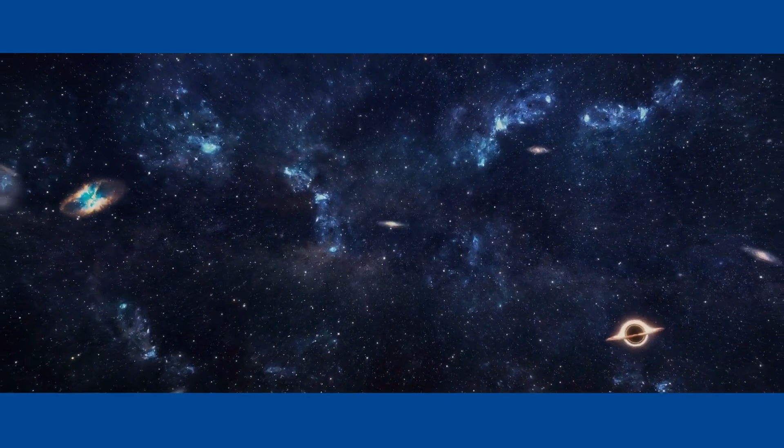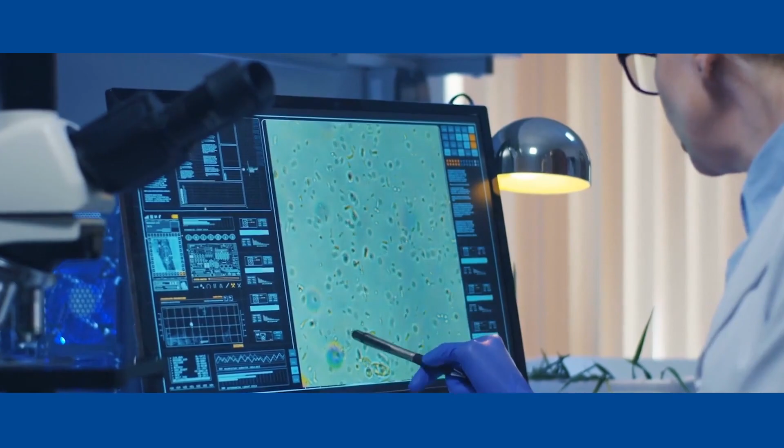In our universe, all things are driven by energy. Energy powers our sun, our environment, our society, even our bodies. Energy is life. New and profound advances in science and engineering are allowing us to harness this energy abundance in marvelous new ways.

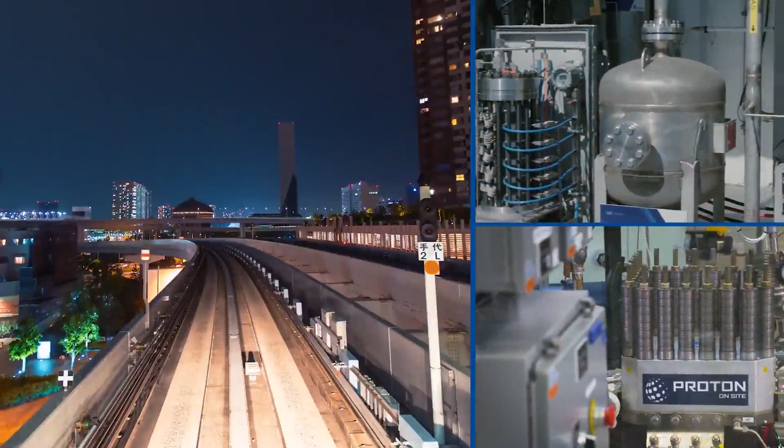To create clean, affordable, and reliable energy for all Californians, the SoCalGas Research Development and Demonstration Program has enlisted an incredible team of experts in science, engineering, industrial technology, and environmental policy to identify, build, and implement these transformational technologies throughout society.

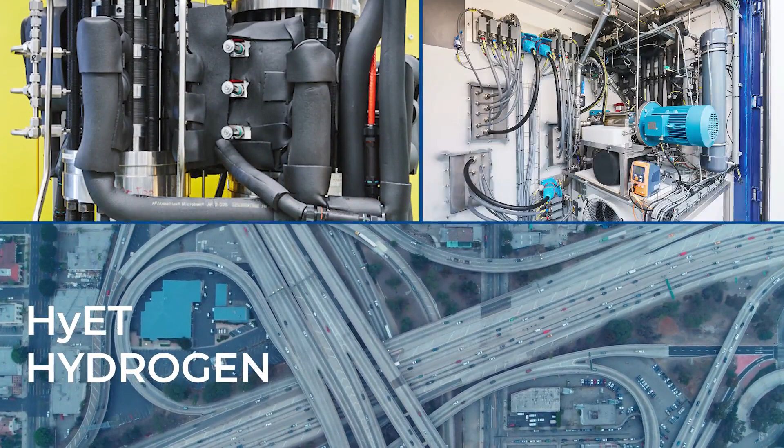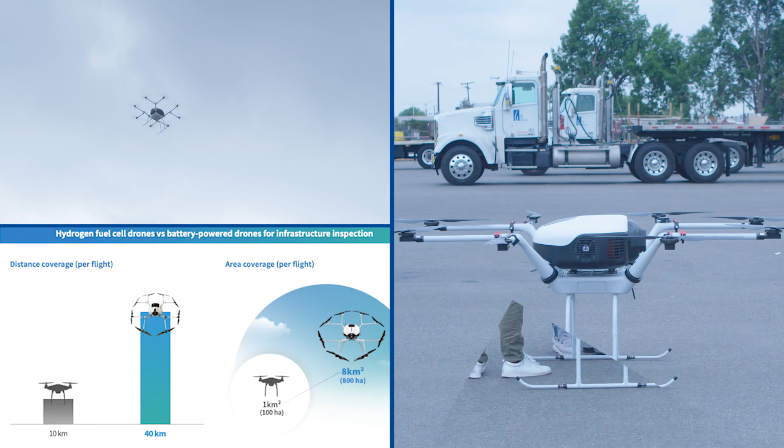Collaborating with the world's top institutions, we have deployed over $73 million on hundreds of groundbreaking projects over the past 5 years. HyET Hydrogen, which could enable transporting hydrogen through existing infrastructure to power fuel cell vehicles and facilities. Doosan Mobility Innovations hydrogen drones that have 4 times the flight capacity of lithium-ion powered alternatives. And hydrogen-powered yard trucks that can move massive shipping loads for 20 hours per day with 0 emissions.

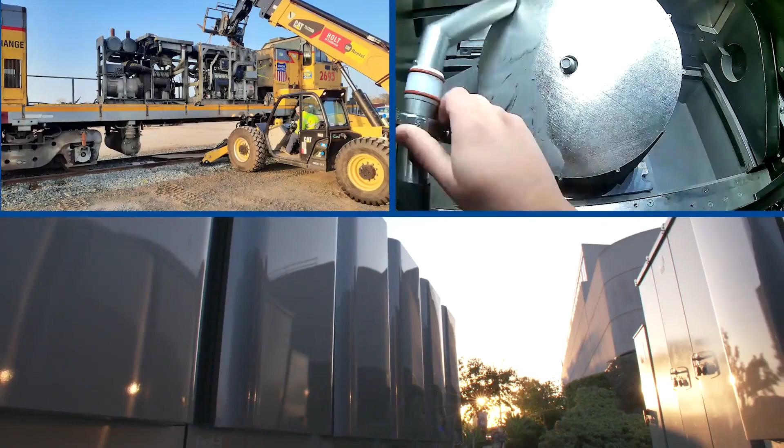These revolutionary projects are saving energy, reducing emissions, and improving air quality, as well as increasing energy safety, reliability, and affordability for all.

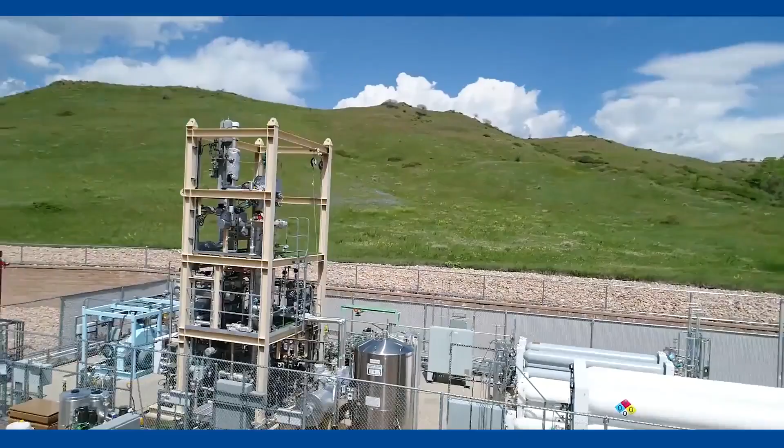At SoCalGas RD&D, we believe in clean energy abundance. So we are sharing this pivotal research in order to deploy these innovative technologies across the world. Because energy is life. And we believe a clean energy future will bring a better future to everyone.

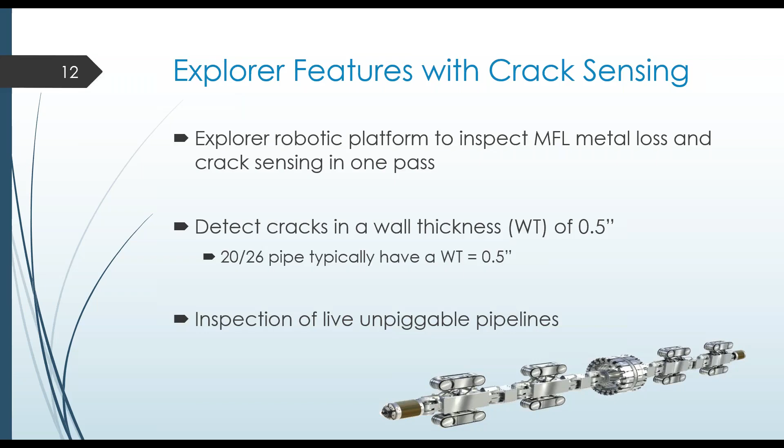There's been a lot of work and technology development to get where we are today detecting cracks in the pipeline. Some of the early crack sensing designs were detecting cracks on the full circumference of the pipe. One product used transverse magnetic flux leakage, TMFL, and electromagnetic acoustic transducer technology, EMAT. The second design is a full circumference anisotropic magnetoresistance, AMR, eddy current sensor, which we'll get into later. I just wanted to give an overview of some of the early designs we looked into.

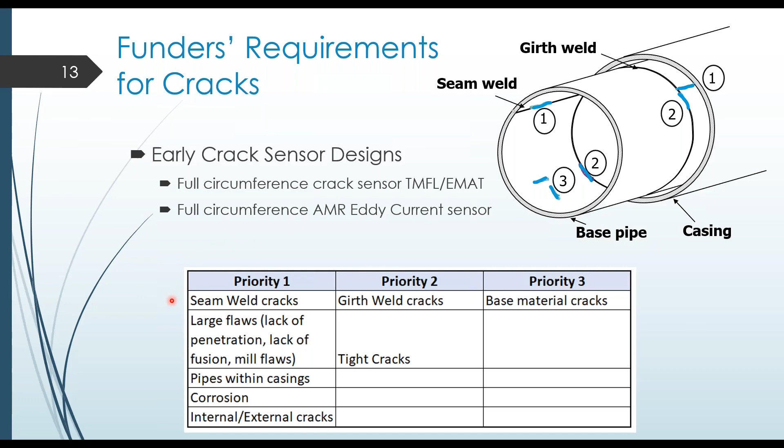NYSEARCH's journey into crack sensing began in 2011. We started with the full circumference TMFL and EMAT sensor. Although very successful, there were some challenges with that design, so we continued investigating technologies to optimize it. In 2013, we moved to the AMR eddy current design, which also had some challenges, but I'll get into these designs and challenges in this presentation.

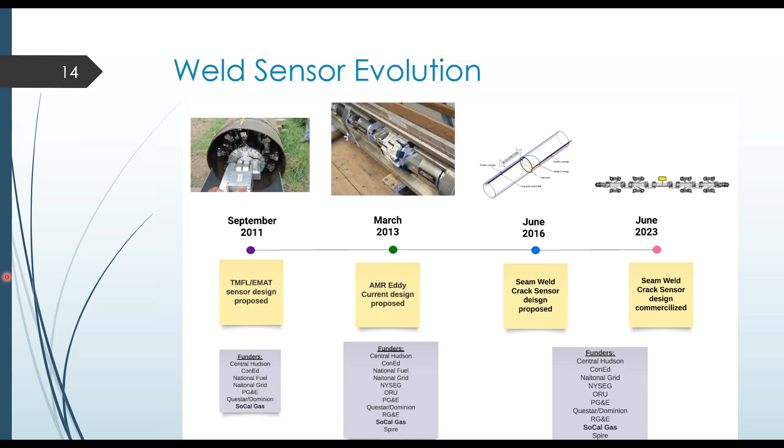The first technology I'll talk about today is the TMFL EMAT sensor. Current technology on the Explorer robot can determine metal loss on the pipe due to corrosion using the magnetic flux leakage, MFL, sensor. These sensors magnetize the pipe wall in the axial direction, providing great capability for corrosion defect detection. But when we rotate 90 degrees, magnetization detection of axially aligned cracks can be achieved. This is known as transverse magnetic flux leakage, TMFL. The other part of this sensor technology is the EMAT.

This brings ultrasonic methods to applications where we don't need gel or water to bring out the acoustics. The EMAT sensor system requires a magnetic field in the base material along with a pulse coil that causes an acoustic pulse to travel through the material. These two technologies, working together on the robot, were successful in finding cracks on that full crack sensor pipe.

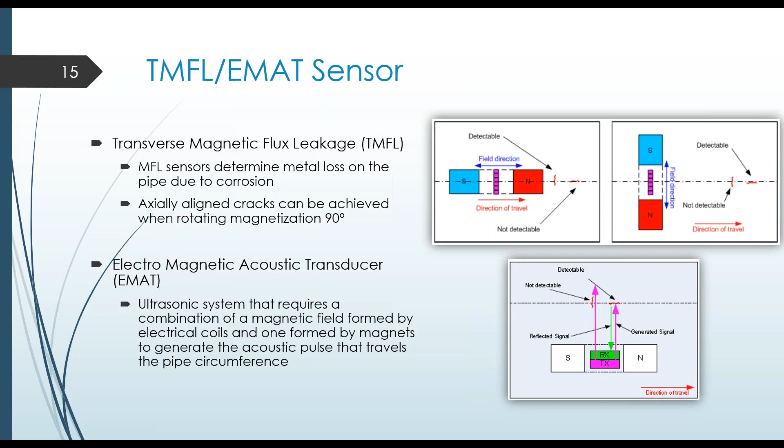So this technology was successful. It was able to detect cracks at depths greater than 25% of the wall's thickness. Since it was a full circumference crack sensor, it could detect cracks along the full surface of the pipe in one single pass. But it was separate from the MFL mechanical damage sensor, so two passes would be required: one for standard MFL mechanical damage and another for this crack inspection.

However, the commercializer believed it was too heavy and difficult for the Explorer robot to maneuver, and it was sensitive to debris and girth welds. So we ended up looking at other technology, as I said.

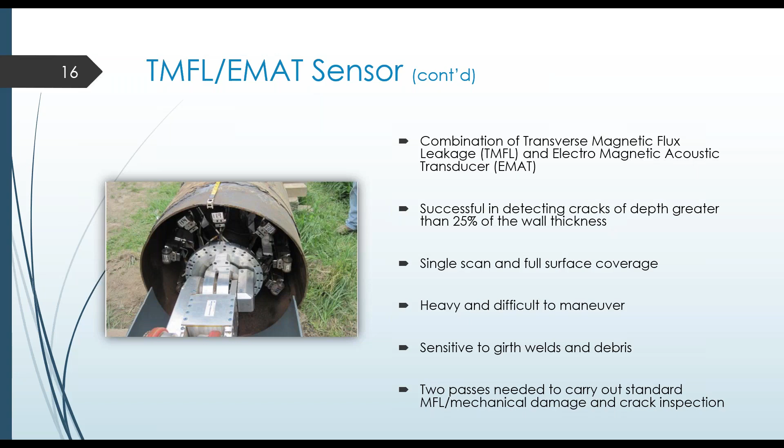The second technology we want to talk about today is the anisotropic magnetic resistive, AMR, eddy current design. Eddy currents have a fundamental depth limit defined and measured by the skin depth - the depth at which electromagnetic currents penetrate into the surface of the material, depending on the material's conductivity and permeability. Some flaws were estimated to be deep enough that only a tiny fraction of the eddy currents would reach them, making it unlikely they could be seen with this eddy current sensor.

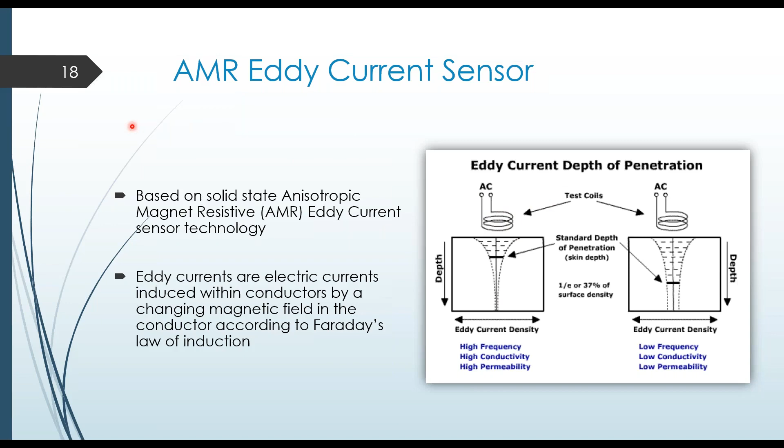This was also a great design. It was lightweight and easy to maneuver. It was a full circumference crack detection design, so it could detect cracks on the base material and on the seam welds. However, it was sensitive to debris, and it wasn't great for larger pipes due to their thicker walls. The downside of that eddy current is the depth of penetration through those pipe walls, so this technology was really only good for pipes about 14 inches or smaller in diameter, since they have smaller wall thickness.

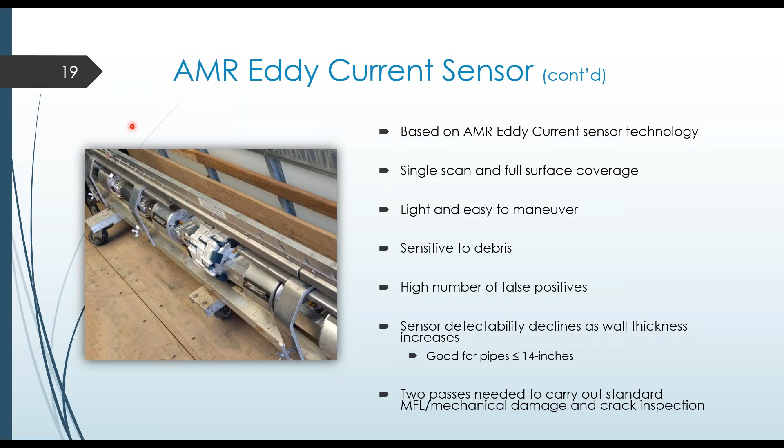Additionally, because the eddy current was a full circumference crack sensor, this needed two passes - one for the standard MFL for mechanical damage, and this technology for crack inspection. So this technology satisfied most of all our R&D priorities, but this sensor was sensitive to debris, though it did work well for pipes 14 inches or less in diameter.

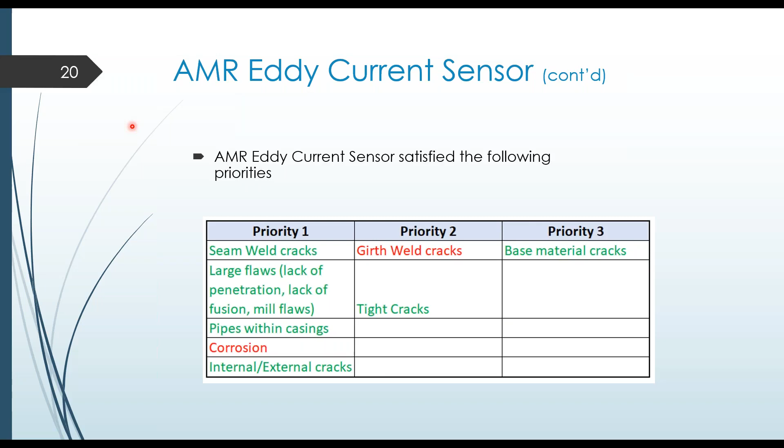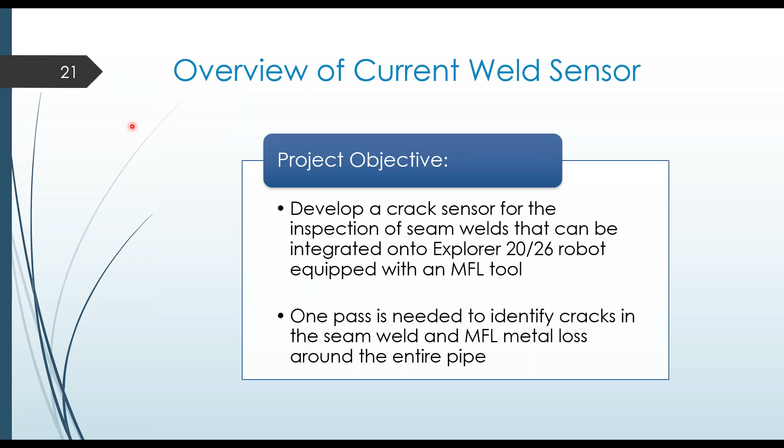Getting into our current design for our Seam Weld sensor - in 2016, when we looked at the R&D priority list again, we decided to target the seam welds and develop a Seam Weld Crack Sensor. In making that decision, we decided it would be great if we could do one pass, if we could build a robot with the MFL tool for mechanical damage and the Seam Weld Crack Sensor, so we would only have to do one pass instead of two like our previous two designs.

To satisfy those requirements, we designed a crack sensor module that would have two sensor modules, one in front of the MFL tool and one behind it. This design would have full coverage of the seam weld and have the MFL metal loss module as well in the center. The way this design works is the two modules work in concert.

The front would act as the leader and the second would act as a follower. The first one would find the girth weld and then look for the seam weld. Because it does miss the beginning of the seam weld, once the leader locates the seam weld, the second one would move to the seam weld before it reaches the girth weld.

I have a video - this is detecting the leader, and this is the follower, same here. This diagram shows it, but I do have a video if I can pull it up.

I don't know how to... I think I might have to get out of this - oh, here we go.

So the video shows the leader. It finds the girth weld and it's now looking for the seam weld to move into position. It now communicates to the follower where the seam weld is so it can transition before it gets to the girth weld. With both of these working in concert, you can get full 100% coverage of the seam weld. I'll play it one more time just to get a feel for what the two working together looks like.

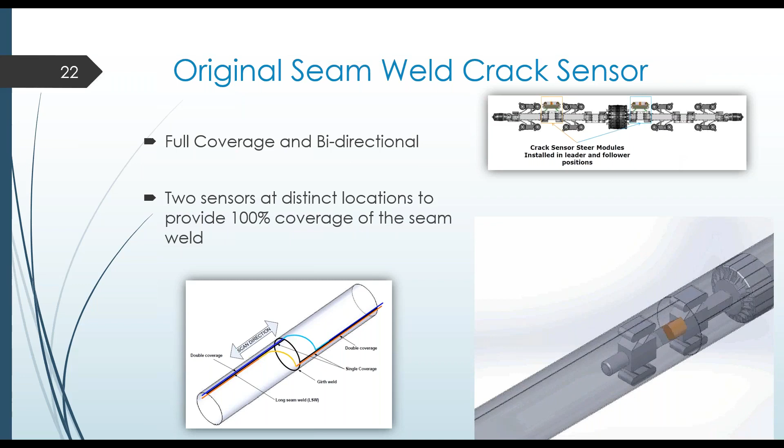Things that are going on in this robot: we're looking for the girth weld to signal the seam weld location change, and we're looking to read the welds on the cracks.

In the early phases of this project, we struggled with finding the low signature welds, the ERW welds. So we went back to the older versions of crack sensing we've been talking about today and reevaluated those technologies to determine the best for weld detection, especially for those low signature welds. We looked at AMR eddy current and EMAT technology for seam weld detection, but they both displayed limitations and would add complexity to the system.

The CMFL did capture a clear signal for three different seam weld profiles, the low, medium, and high, and had clear scan results. The CMFL system is the same technique we used with the TMFL and EMAT system that we discussed earlier.

In these pictures, you have the magnet bar with the north and south poles, like we talked about in the TMFL and EMAT. The magnetic flux enters the pipe wall through the weld and then back out the other side. You can see in the picture, I'm pointing out the seam weld and the arrows to demonstrate that.

Anomalies show the deviations from the signal, like the picture on the right. You can see the base material cracks and the small magenta lines pointing at them, as well as the seam weld cracks where the black arrows point to the long seam weld, and small arrows pointing out the cracks along the seam weld. The goal is to achieve a small strip of data on or near the seam weld. You can go to the next slide, Daphne.

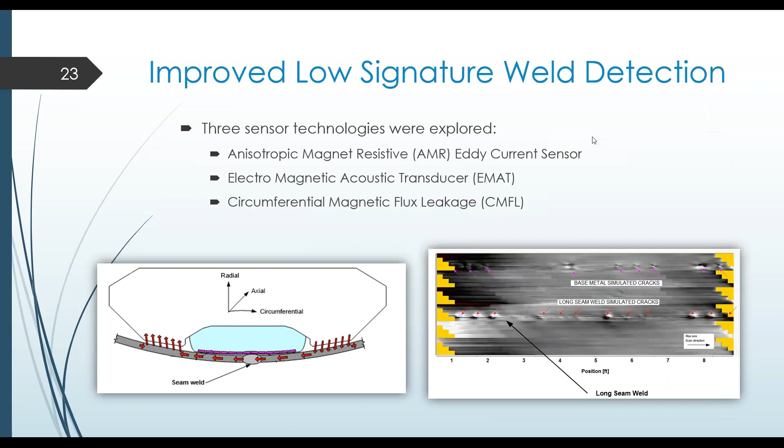Since the technology of the CMFL was developed, the technology has advanced, and these Hall effect sensors that were used previously have gotten smaller. This really aided in slimming down the design and lowering the weight of the modules as well.

So even with the sensor optimization, the robot is still a little heavy to maneuver. So we decided to remove the center MFL that you can see in the first picture from the robot, and then just have two sensors. You can see how long the robot is with it having two sensors and removing the center MFL.

We did a lot of analysis in terms of the tow force that the robot is capable of, as well as the distance between the sensors, because as you saw, the communication between the leader and the follower is important to give it enough time to talk to each other before it moves into position. So these sensors would need to be spaced so far apart that they could still communicate.

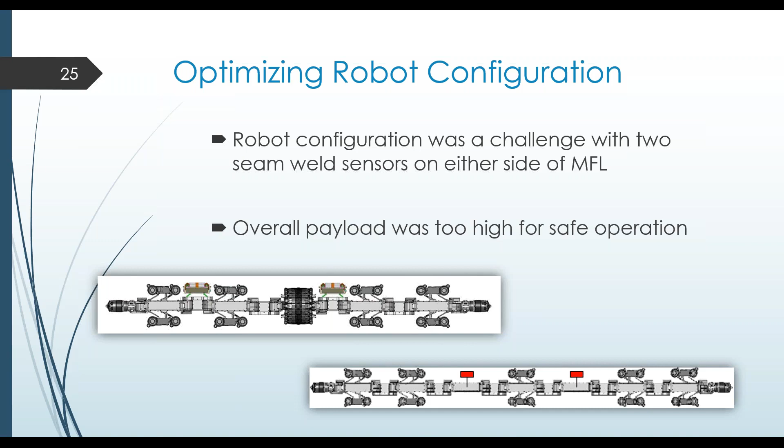So if you want to go to the next slide.

Here is the weld sensor that we chose. It's most optimal, as the Seam Weld sensor and weld finder are all in the yellow box in the center, with the Seam Weld finder and probe in the center with 4 drive modules.

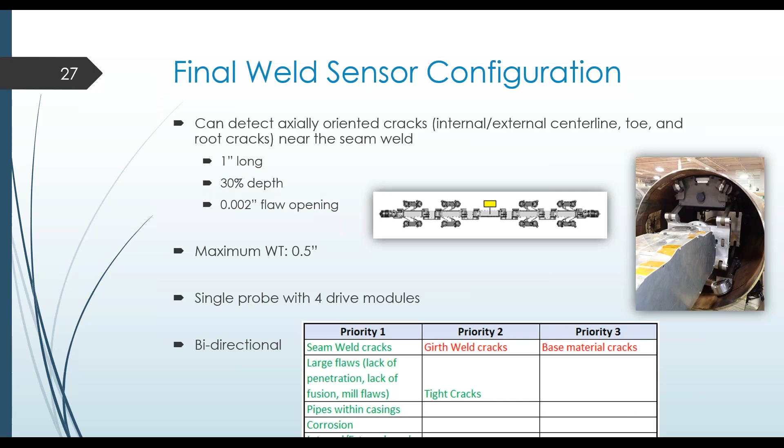So where are we today with this technology? Intero and Pipetel are working on commercializing this robot for 16-inch through 24-inch pipes. Summer last year, the 16-inch Seam Weld sensor completed a job with SoCalGas, and this concludes the NYSEARCH Seam Weld sensor program.

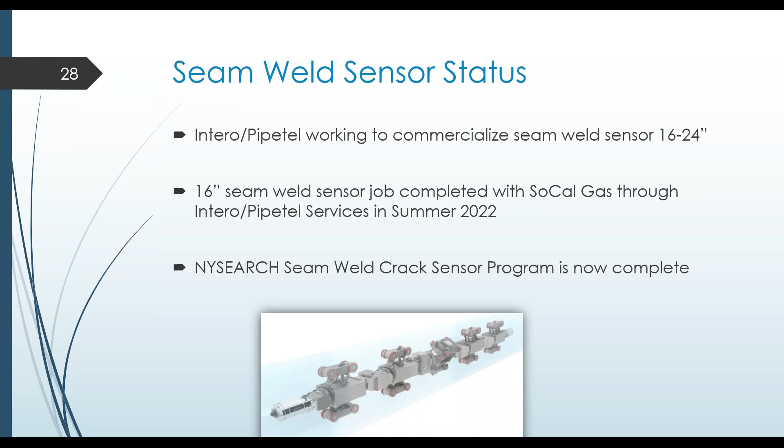So we did get some questions before the webinar, which I think my presentation did answer some of them. There was one about the Explorer's range, which is about 1,600 feet on a single charge. But Pipetel has a tool called the inline charger, and it is able to charge the robot without removing it from the pipe.

We also completed a project with Intero for an energy harvester, which is a module that can be installed on the robot to extend its range as well. That does conclude my presentation. I don't know if there are any other questions.

Thank you, Suzy. Thank you, Daphne. I appreciate it.

This is one of the true successes of our research program and funding, and having this, as Travis said at the beginning, being able to utilize this technology and integrate it into our integrity management program is huge. We just keep trying to push that bar further ahead, which is great.